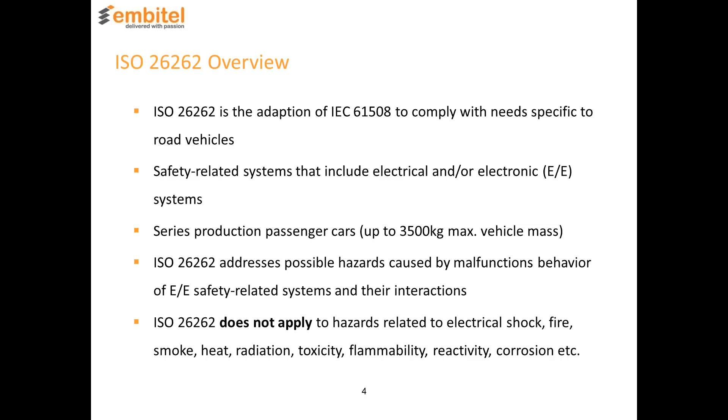It's also focusing on the safety side, not on the security side. That's also important, as you can think of scenarios in the future. If you have car-to-car or car-to-X communication in the future, then the topic of security, so intentional misuse by powerful organizations or people who know details about certain systems and how they can misuse them. This is also not part of the 26262. This would be a separate topic.

So now I'd like to introduce this picture. This is part of the 26262, and I like it very much because it gives you a very good overview of the content of the standard. There are actually 10 parts in the 26262. The last one was just published, I think a few weeks or months ago, at least this year. More about organization of the standard than content.

Safety management is very important to be considered. But there is also definitely an organizational part. We need to organize certain things. For example, different people have to come into a project. All these kinds of scenarios are handled in that chapter. You also have to take care of the organizational areas.

Second line, safety life cycle, the content of the project. You try to define what the risks are that could come out of the system. This is connected to part 3, because whatever language you use, at least you need requirements, and you also need requirements on what you have to implement with your customer. Also, kind of in parallel, you're writing down your functional requirements.

Part 6 of the standard is all about software, architecture, design, and for hardware, design and architecture. Also, the constraints are there. We also have to take care of the production area of a product. We have to take care of functional safety, more on the system, hardware, and software parts. Part 8 is supporting processes. An important part about documentation, possibilities, adaptations, possible risks in it.

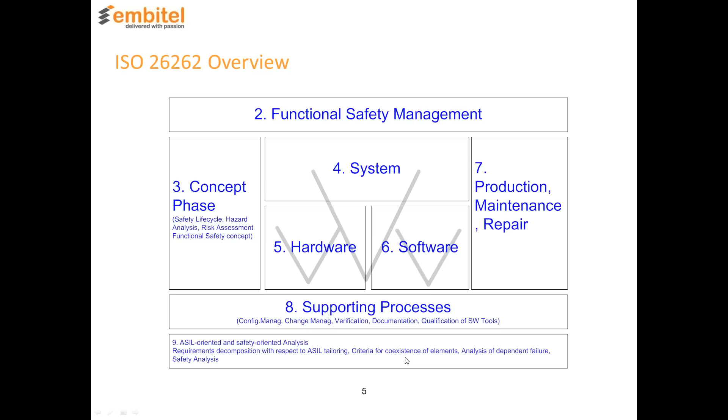So due to some technical problem, we went away, but we are now back, so we can continue.

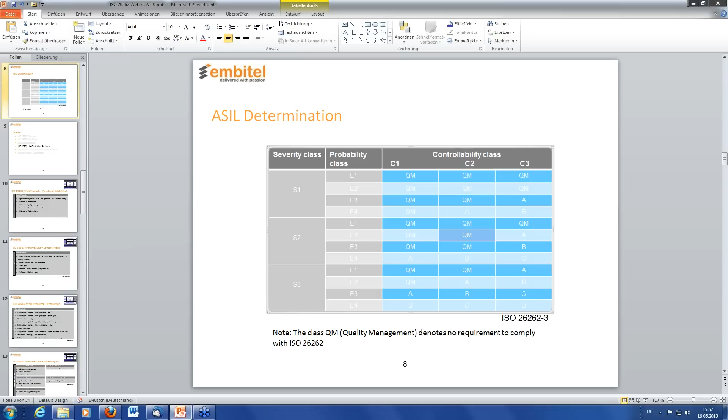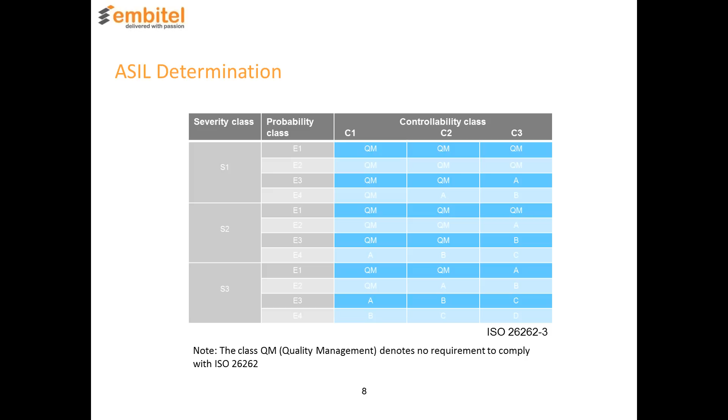So yeah, we had the ASIL determination. So quality management: you see, in a lot of cases you don't even need to consider the 26262. So now about the life cycle work products coming out of the 26262, which you have to produce or have to show to a certification body or to your customer.

As you see in the right corner of the slides, I'm going now through the 9 or 8 parts, where I should give you just an impression about the work products of each area. Part number 2 is the functional safety management, and there you see you have to produce some evidence of competence. You have the organizational specific rules and processes for functional safety to document, to show, to demonstrate, but not only by words. You have to do it in a written form.

Evidence of quality management, so your own quality policy in the company. Normally, the functional safety assessment plan is more about specific areas of functional safety, so there you have to consider chapter 2 of this 26262. Evidence of field monitoring is about products which are in the field. You monitor how many failures occur, and maybe use it for certain argumentations.

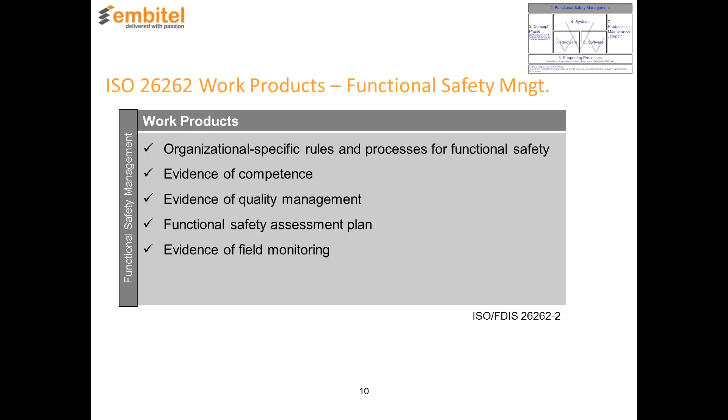Concept phase, the third part, number 3 of the standard. What has at a minimum to come out of this? Important is to demonstrate, and this is normally easy: is it the development of a new product, or is it a modification of an existing product? If you're talking about an existing product and you only modify it, then of course you have a lot of the artifacts already, or you may have developed the product before the 26262 was even applicable,

and it's a very interesting point to be discussed with the authorities, with your customer, whether you have to bring the whole product now to a 26262 level, or you can start using the 26262 only for the changes you're doing now. In case you're doing a completely new product, you have to do the whole life cycle. Hazard analysis and risk assessment is what we talked about in the first steps. Safety goals, we talked about before. Functional safety concept, as I said.

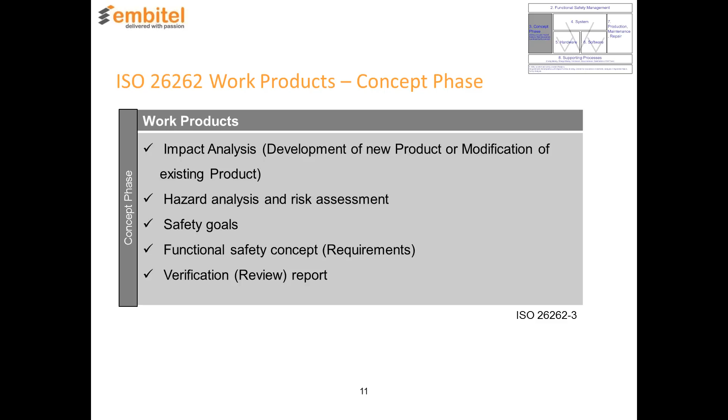And the verification is to show that you have done it, or to verify that this work exists, this artifact exists, and normally it's the good quality policy that you have a four-eyes principle, your normal company-wide quality policy, so that somebody checks that these work products are proper, consistent and correct. Therefore, this is what's meant here with verification report, rather than testing or something like this.

So now we're at production, where I said this is not really the main focus of this webinar, so I'm going quite quickly through it. As you see, safety-related content of the production plan, safety-related content of the production control plan, control measure report, assessment report for capabilities of the production process, interesting, important words, safety-related content of the maintenance plan, repair instructions, so that we ensure it over the whole life cycle of the product. Life cycle means as long as it's in the field.

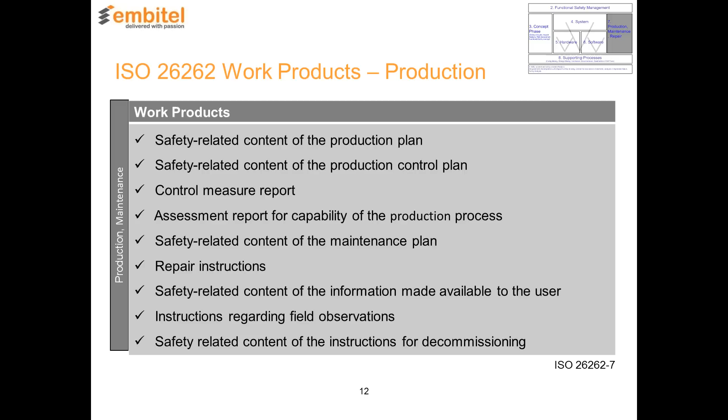So even if you repair it 5 times, we still ensure that functional safety is considered and the system is functionally safe. We do not introduce new failures. Safety-related content of the information made available to the user. Instructions regarding field observation, safety-related content of the instructions for decommissioning. Even decommissioning is addressed in the 26262 too. A very short overview, but you see there's a lot of stuff there.

Chapter 8, part 8, supporting processes. There are 5 main parts. Distributed development is addressed. Change management is addressed here. The tool qualification, the configuration management, the documentation process. I left out the verification, as I had it before on the slide, and I don't want to duplicate information. The verification is part of parts 4, 5, and 6 from my side. There are some statements about verification in part 8, but nothing really important for this webinar.

So distributed development: supplier selection report, so that you can demonstrate that you have the right suppliers which have the capabilities to work in a functional safety project, development interface agreements, supplier project plans, safety assessment reports of your suppliers. Or if you develop in your own company but have it distributed over the world, globalized, then this stuff also applies.

Change management: here they even talk about a change management plan, and I just take this as an example. This does not mean that you have to write an individual change management plan. You may put it as part of the configuration management plan or any other plan which in your case is maybe the better one. Even if it's a written plan, you don't need to make your own document everywhere there's a plan. Change requests, very important, so that you document your changes.

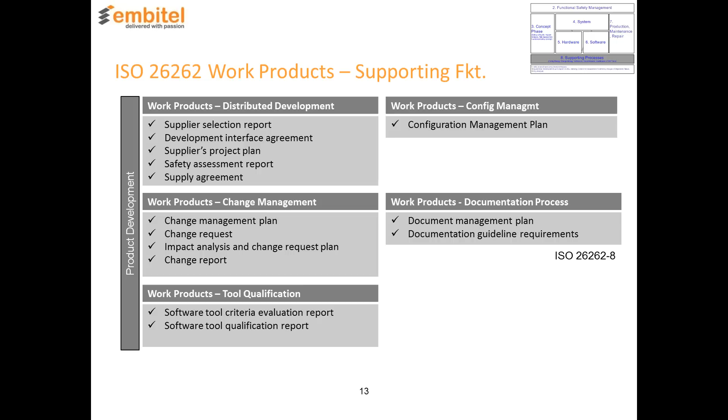Configuration management: configuration management plan. So what is your configuration management system? That is all described in the management plan. Documentation: as I also said already, in big projects it makes sense to even make a plan about the documentation management strategy and document the strategy there. Documentation guideline requirements or templates and things like this. If the project is smaller, of course, this is not so important.

Then we are on part 9, update of the work product ASIL and the safety-oriented analysis. Update or establishing of the corresponding documentation due to requirements decomposition. That's what I meant with the ASIL tailoring, so this is to be documented. ASIL, dependent failures, safety analysis. I want to go over this a bit quickly as this is not the real focus of this webinar.

Here now, part 4 and part 5. Here's our well-known V model. On the left side, the development part. On the right side, the verification part. This is from the system side. The top box is detailed on slide 16, and the software part is on slide 17, the next two slides. In a lot of cases we discuss system requirements, software high-level and low-level requirements, then the software implementation, and then the testing accordingly.

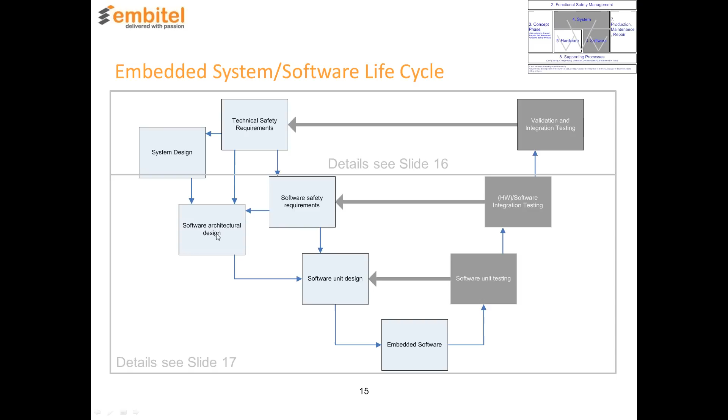From my side, the design and the architecture are very important, because without architecture and design and proper traceability, these blue lines mean traceability there. I don't say it's easy, but it needs some thought. Then it can be done in a quite proper way, but this is required. Otherwise, your requirements alone are not good enough. And a lot of projects miss the design and the architecture, at least in my experience. They go straight to code, write some requirements, but miss the architectural part.

So slide 16 is about the outcome. We're talking about the work products for system. You need to have a project plan and a safety plan. You have a technical safety requirements specification, so system requirements. Therefore I put it in the V model so you can see we are talking about the high level. We have the validation and integration testing. As we are on system level, we of course have the integration. As we have the whole system integrated, we're doing validation testing.

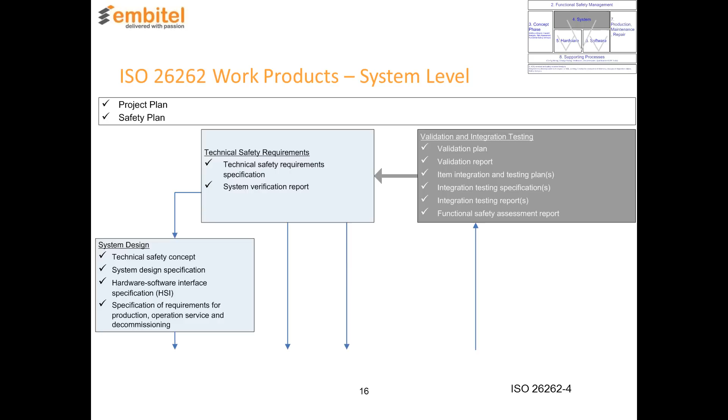We have to give an answer to all these items written down in this box here, and on the very left side we have the system design and all the areas. They require, for example, a hardware software interface specification, system design specification, technical safety concept, specification of requirements for production, operation and decommissioning. There we are going a little bit into the production area again, but the first three are important here: architecture, requirements, and validation or verification on the right side.

So then in the software area, you have software safety requirements. Here are the details. You have a software unit design.

You have the embedded software here. This is just the source code. This is always to be delivered. This is, of course, no problem. This is your product. This is your functionality.

The software architectural design. So I want to demonstrate there are kind of two levels from my point of view, at least in bigger projects, high level and the lower level architecture, or first architecture or first design and then a lower level decomposition. And you have the unit testing or pure software testing, and you have the hardware software integration testing with verification plan, with verification reports or the results, verification specification, so your specification of your test cases, and so on and so forth.

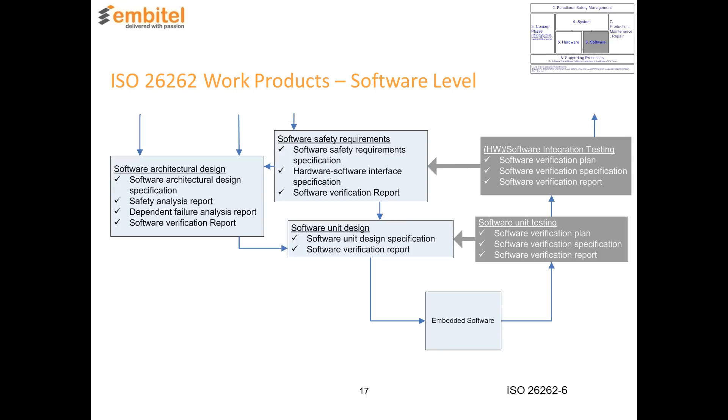Again, back to the V model, because the last part which is missing is the hardware. And again, I'm back to the V model which shows also the system part here, because the second V model is or could be system requirements, hardware requirements, and then the hardware instead of the software we had before. And there we have hardware integration testing and on the hardware level, the details are given here.

Hardware safety requirements, again, the requirements, the hardware design, design specification, safety analysis, design verification report, the hardware itself as an outcome of the product, like the same as the software. Hardware integration testing. Hardware integration test report is a simple example in the standard. However, you also need hardware. You have to describe the test case. You have to do a test procedure. You have to have test results.

And to be able to document and demonstrate this all, if some certification body wants to make sample reviews on it, means normally an effort. And to still see that you get a profit out of your project, you need to do it in a very effective way. Same for the software, but it's also valid here for the hardware. I hope that you get a bit of an impression that the standard requires, let's say, quite a lot, and it's very good to have somebody experienced who could guide you a little bit through this part.

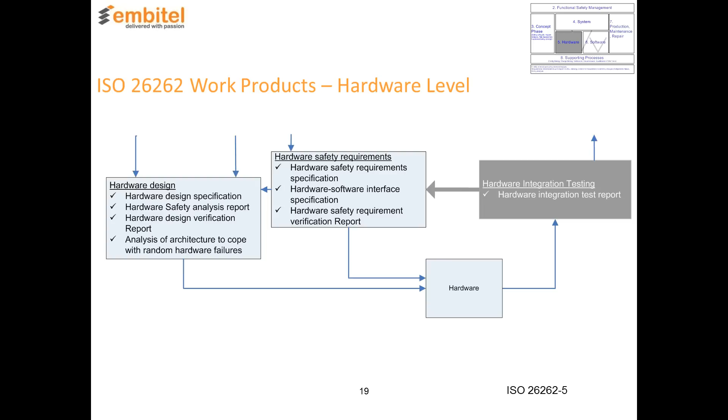As I said here, I'll make the example for the hardware integration test report. Yeah, it's only a test report, but what is the content of a proper test report? Not too much, but not too little. This is the difficult part of it.

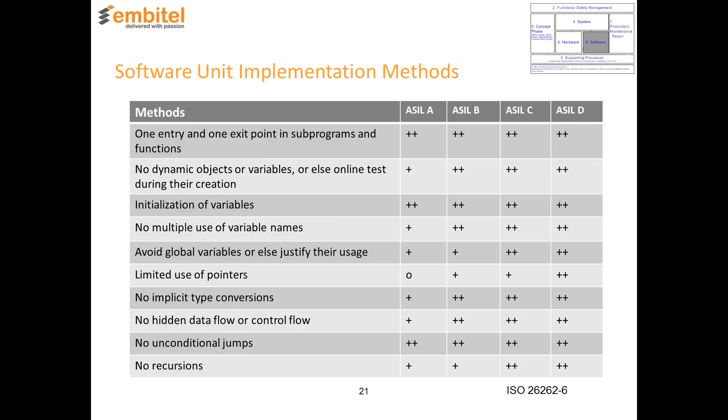But I wanted in this webinar to give one slide about what such a table looks like, and how it feels, what is in the standard. With the example of software unit implementation methods, you now have hopefully a detailed example, and a feeling for what this 26262 is about. So that's about it in this webinar from my side.